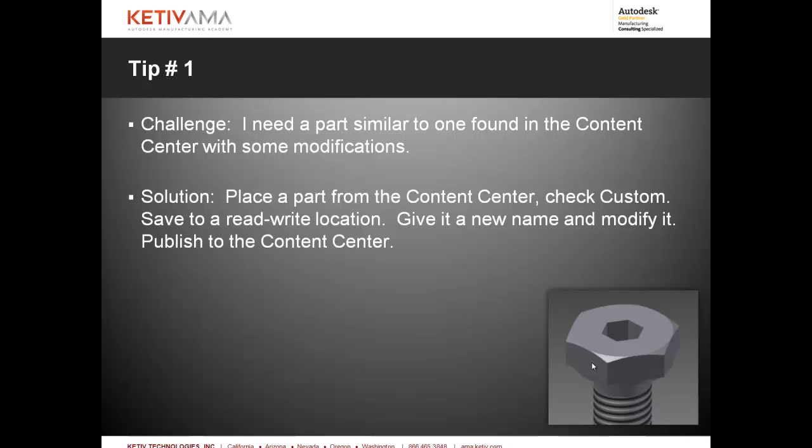Tech tip number 1, challenge: I need a part similar to one that's found in Content Center with some modifications. This is very common with our customers where we need to add something to our Content Center, but we don't want to start from scratch.

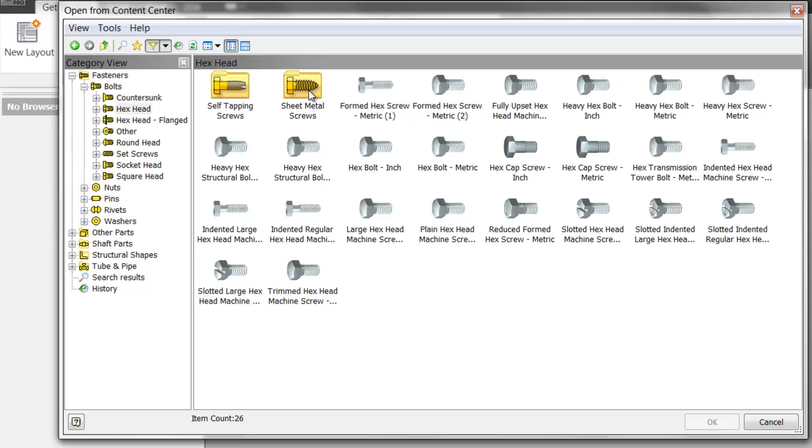To start off with, we're going to open a part from Content Center. What this allows us to do is save a copy of this part so that we can make modifications. Simply browse to your component. In this case, I'm doing a fastener, but you could do this with any other component, a shaft part, structural steel shape. Select the size that you want to make a change to.

Come in and save this as a copy. Again, standard parts from Content Center you cannot modify, so you must save them as a copy in order to make any changes to them. Once you've saved a new part, just open it up and make some changes to it.

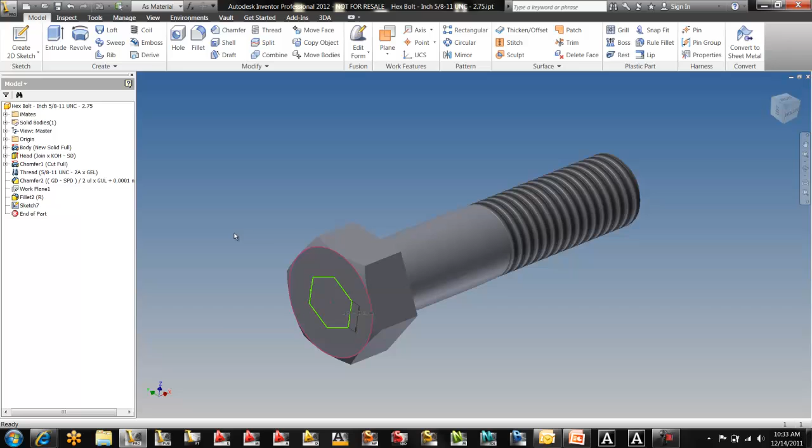Now, in this case, what I'm going to do is just add a sketch to my component. The sketch is going to be in the shape of an Allen wrench. Sometimes you need to change the head size, there might be an extra washer on there, whatever it may be. In this case, I just added a sketch and want to remove some material so an Allen wrench can be in the center of this bolt.

Now, once I have this completed, I can now author this and publish it to my Content Center. This is really where the advantage of reusing information from Content Center pays off.

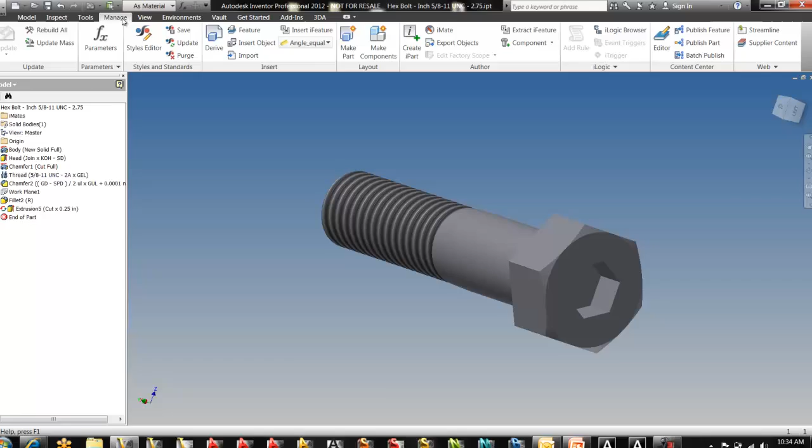First step you see here is the author component. And once I'm in my author component, what we're going to see is the mapping for the insertion, and then also once we select our parameter mapping, that's already done. So by reusing a component from Content Center, all my mapping is already complete.

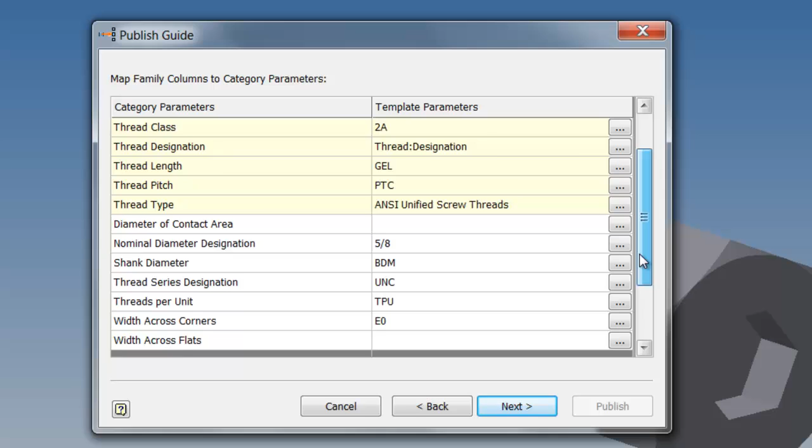Now if I had started that from scratch, I'd actually have to go in and select my components to map. You can see here, once we've authored, we can jump into the publish, and then in the publishing, the family columns are mapped. This is the same information we saw in the authoring. Here are our parameters, and that's how we'd step through the process if it wasn't already done for us.

The next step here, we can select our different columns. So when I selected this bolt initially, we had the size, the length, and then if it was coarse or fine thread. What you select here in your table columns is what actually appears when you insert the bolt. So this is where you can decide what you want to be inserting your component with what different parameters.

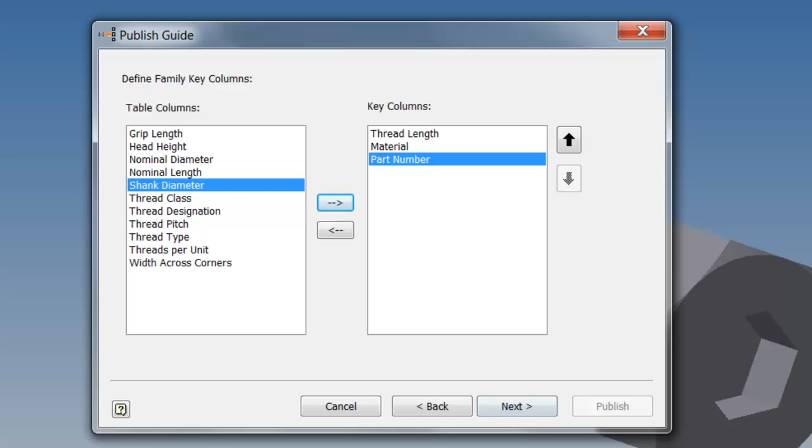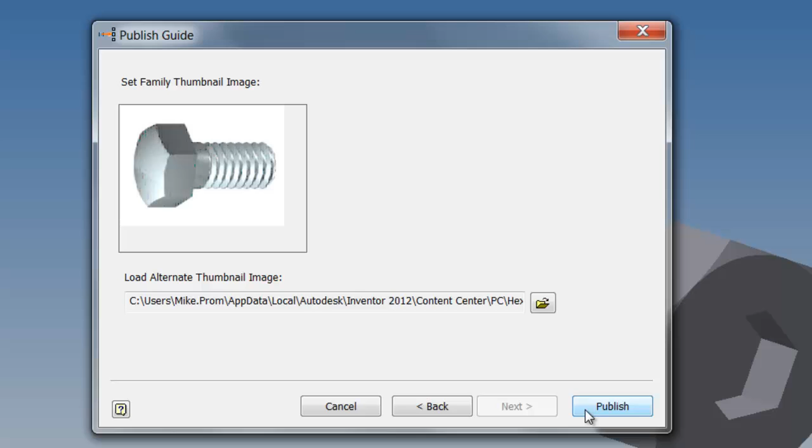Next step of the process is just going to be go into the different names of the properties. Select whatever you may, and the big thing with this is it allows you to search for the proper component. So the name is important in that, and then also some of the standard organizations allow you to do some different filtering and searching. Just hit publish, and that completes the step.

Now our next tech tip is a motion assembly to see if components are actually going to hit each other. The idea behind this is I have an assembly, I haven't quite got to the level where I want to do some actual dynamic simulation, but I want to see if it's going to function properly. Now in this case, I have a sawhorse with some adjustable legs, and I want to make sure that they're going to adjust properly.

So I just remove my mate constraint in it. Notice that I can actually go through the other components, so I'm going to select my active contact solver. Now, once I select that, I actually then have to go in and select the components that I want to be in my active contact set.

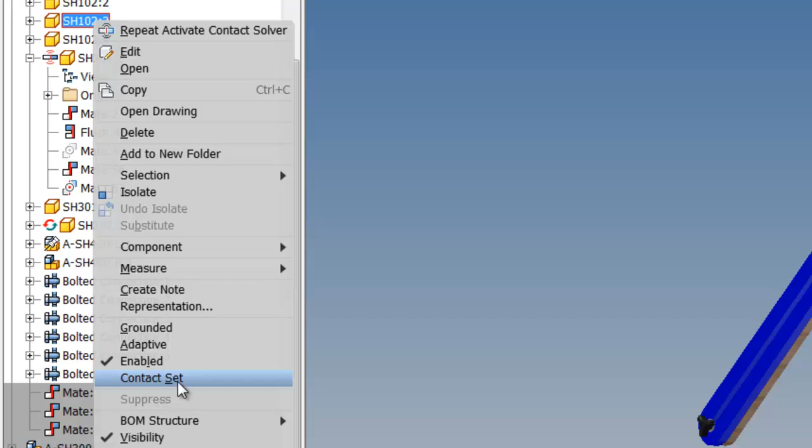And you can see once I right click on the component, I get the option to Contact Set, and I select the different components that I want to see if they hit each other. So once I select all my different components, we'll notice when I come in and I grab the leg and drag it around, it's not actually going to move through the component once it hits the upper housing assembly, or when I drag it down and it hits the bolt, it's actually going to stop.

So as I drag it here, you can see it stops. Drag it down, it's going to stop in both directions. So I can simulate how this is going to function without actually going into a dynamic simulation mode.

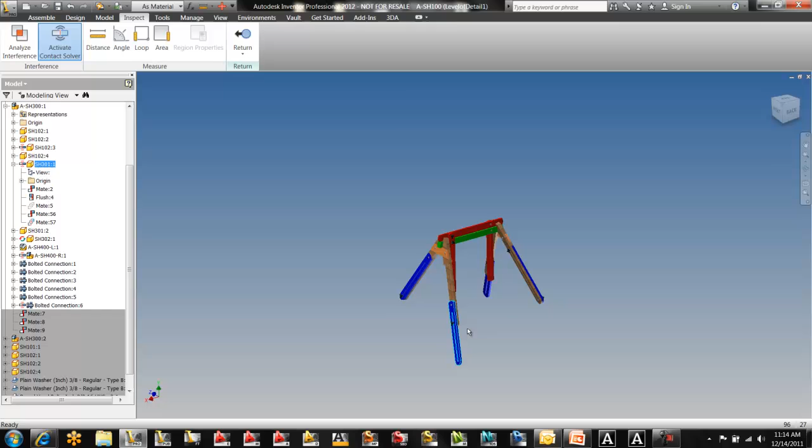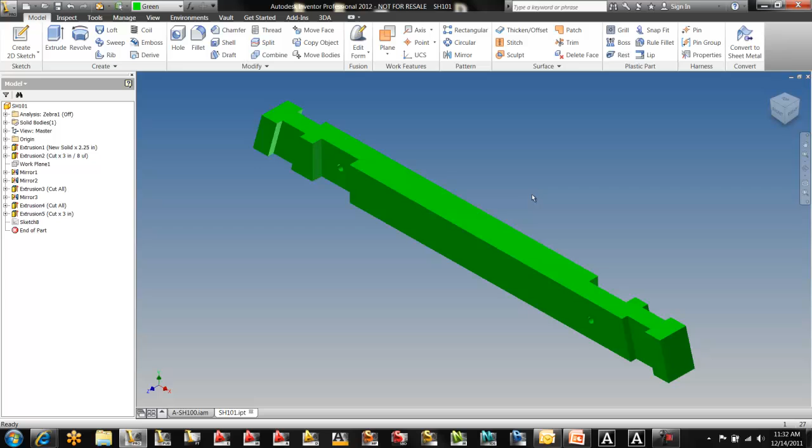For our next step, we're going to take a look at, I'd like my part number to actually show up on my part. So the big trick here is going to be actually using some of our emboss tools along with text capabilities inside of a sketch. First thing here, I'm just going to open up my part and apply a simple sketch.

Once I'm in my sketch mode, I can insert a text. In this case, you want to be able to change what style and also the size of the text. Notice I'm able to drag around and move it. I could actually lock this down with dimensions as well.

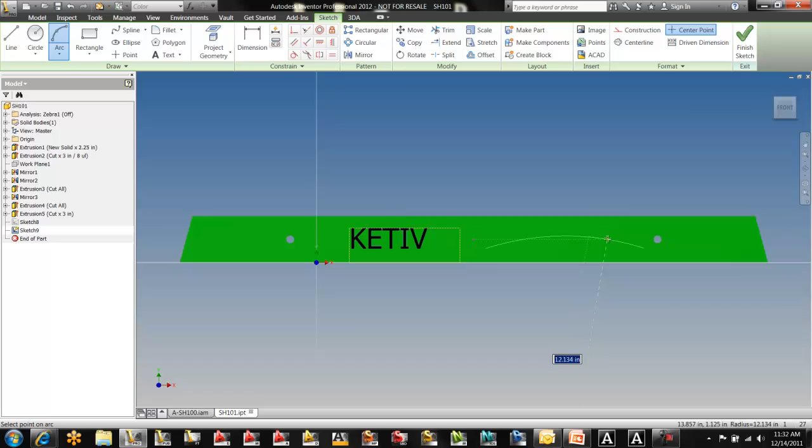Now, another type of text is I can actually have text follow geometry. In this case, I'm going to make an arc and then change my text selection to geometry text. Now, just like before, I just enter in the text I want to use. We can see here the font style and also the size I can change if I'd like. Once that's complete, notice how it actually follows the geometry.

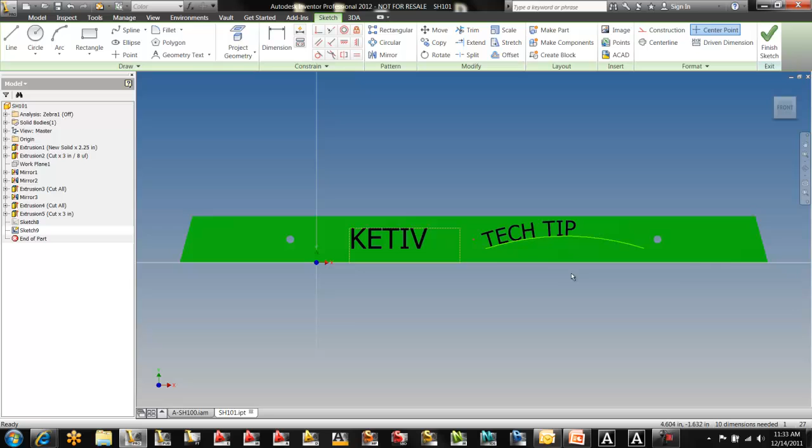Now, once I've completed my sketch, I can then come in and use that emboss tool. Select the geometry that we want to emboss. We can select the depth, and if we want to emboss, or flip the direction and engrave it.

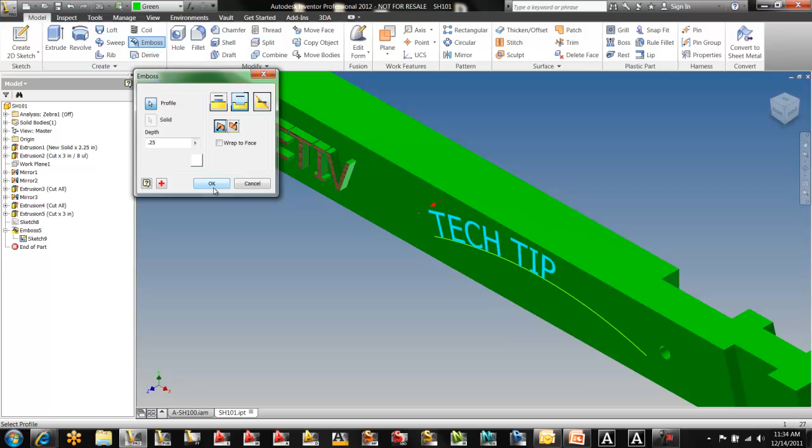Now, that sketch contained two different text features, so if I select the sketch again and select visibility, I can actually turn that back on to reuse that sketch. So that's also kind of a side tip there, where if you have multiple sketches inside one sketch or multiple geometry, to reuse it, you just turn that sketch back on.

I engraved it there, and then I turn off the visibility, and we can see that my word and my text is now engraved in that part.